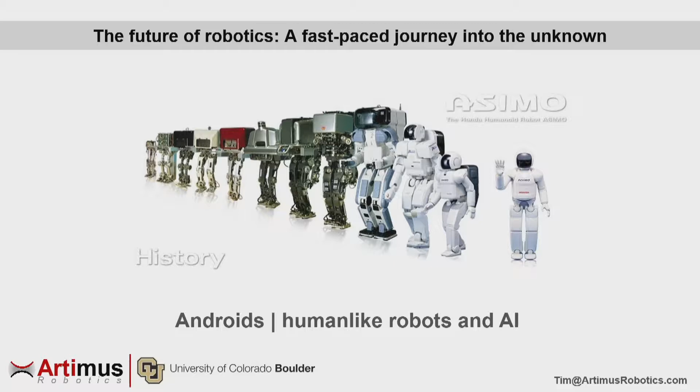So I think we're in for a very exciting conference. With that, I want to talk to you about robots. If I asked you to picture a robot, you'd probably picture something like Star Wars' C-3PO, and that's because that's what the history of robotics has looked like. But if I asked you to think of the future of robotics, you might take a very different vision. Maybe you'd picture something like Westworld's lifelike robots, which could even be a threat to humanity. But instead of thinking of how the rise of technology and robotics will lead to our downfall, I want you to imagine how robotics can empower us, even lead to the next stage of evolution.

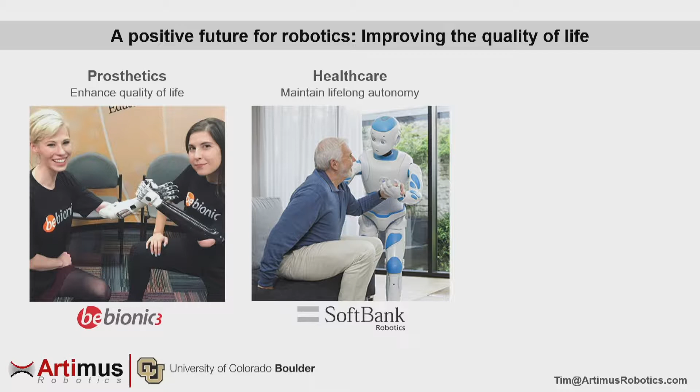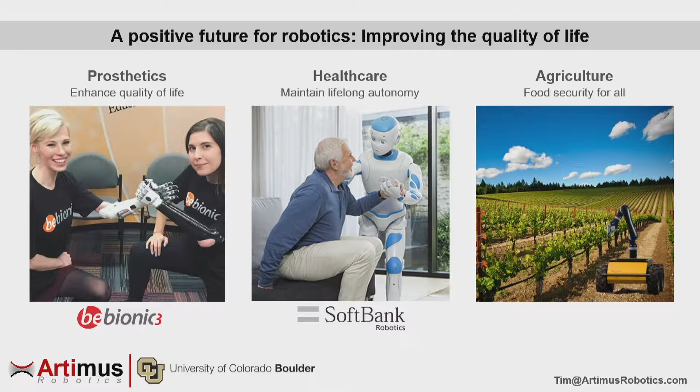Because when I think of a robot, I think of so much more than a vacuum cleaner for my home. I think of a prosthetic device to help enhance someone's quality of life. I think of a healthcare robot, so my grandmother doesn't need to live in a nursing home - she can maintain her autonomy. And I think of an agricultural robot to help feed our growing population and remove the lowest paying jobs. With this beautiful vision of a robotic future, you should not be asking yourself if this will happen, but when and how.

I'm Tim Morrissey, co-founder and CEO of Artimus Robotics, and today I'm here to talk to you about the future of robotic motion. Let's take a look at what's going on in robotics today.

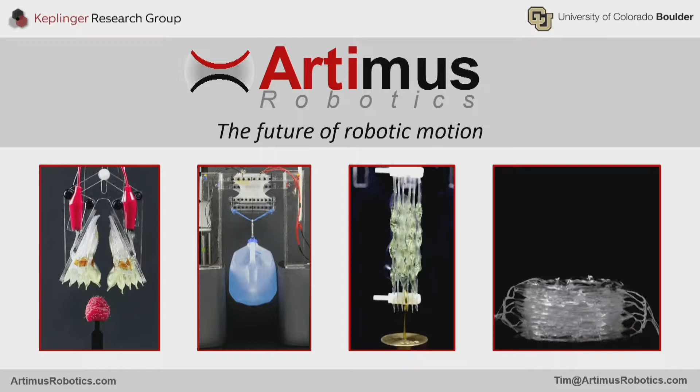This is Honda's Asimo, and if you remove its friendly covering, you start to get an idea of why you and I don't own an Asimo yet. It's comprised of metal gears and motors. These are heavy, complicated, inefficient, making the device expensive. This product apparently costs $2.5 million to make.

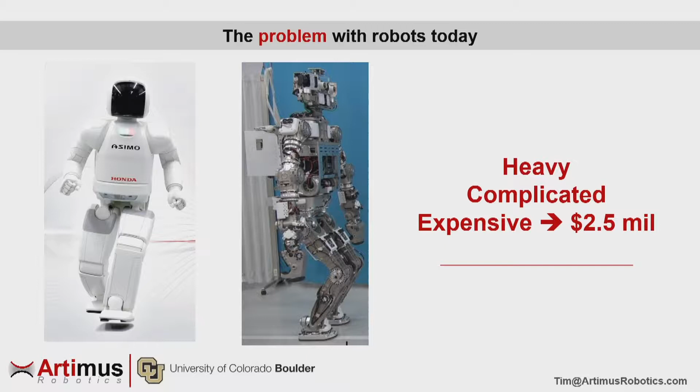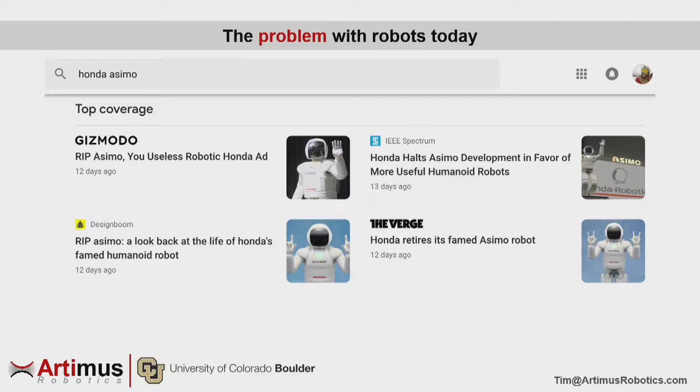And has anyone seen Asimo in the news recently? Honda just announced it's ending the Asimo project. And so if a major corporation like Honda can't figure out consumer robotics, maybe it's time we take a different approach. Maybe instead of using gears and motors, we use something more elegant, something inspired by nature.

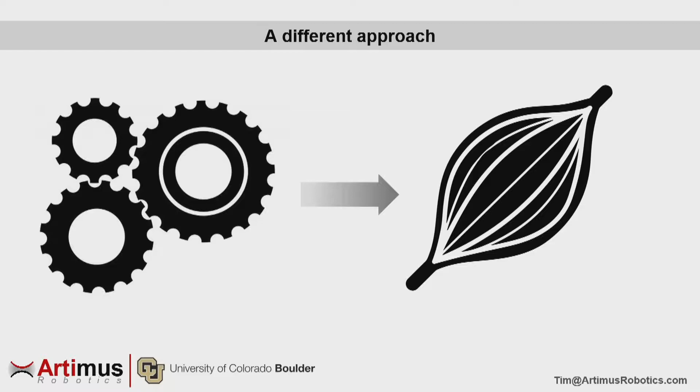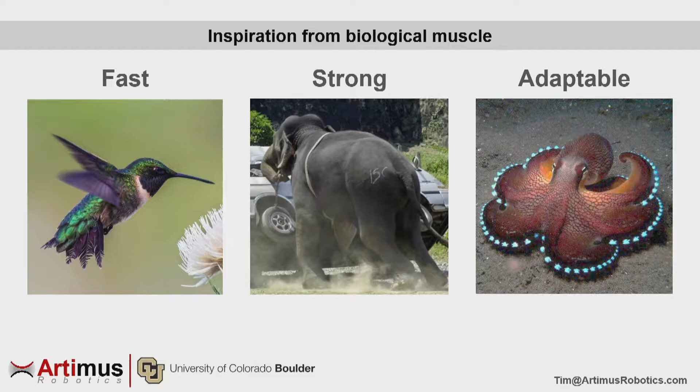The natural muscle is an incredible device. It can be very strong, fast, it's adaptable. My team at the University of Colorado Boulder set off to try to recreate this technology. We tried to make an ultra-versatile artificial muscle.

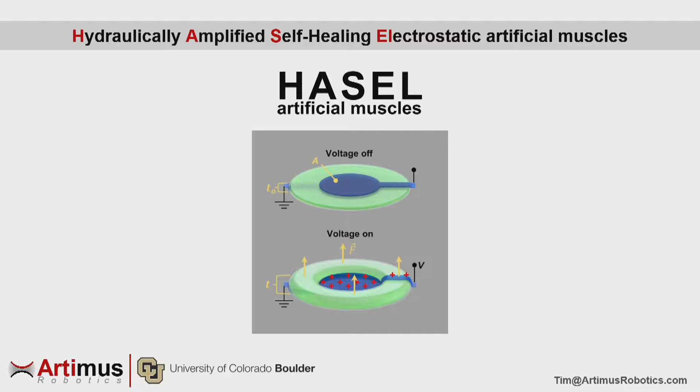We took an old science and applied it in a radically new way to introduce HASEL artificial muscles. HASEL stands for hydraulically amplified, self-healing, electrostatic artificial muscles. And I'd love to show you what we can do with it.

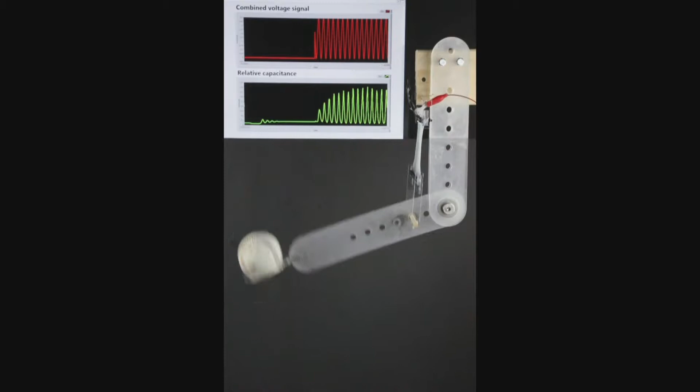HASEL can operate like a bicep with precise motion, fluidic continuous motion, and rapid motion. HASEL, because of its capacitive nature, can be self-sensing - so with the same two wires, you can both actuate and sense position. Because of its self-healing characteristics, you can scale HASEL up and start to do real-world tasks. It's powerful enough to jump off the ground, yet delicate enough to handle simple tasks like picking a ripe raspberry.

We released this work earlier this year, and the response was fantastic. HASEL, a true breakthrough in actuator technology, got national and global press coverage. And I think the reason for this was because of how elegant and beautiful the solution really is.

There are three key components in a HASEL actuator. There's an electrode to conduct electricity. There's a stretchable or flexible shell, like a thin plastic film. And there's a liquid dielectric, which is inherently self-healing because of that liquid property.

The first liquid dielectric we ever used was actually just canola oil from the local grocery store. To operate a HASEL, we'll apply a voltage, which introduces a Maxwell stress that acts on the liquid dielectric. This will locally displace hydraulic fluid and drive a shape change in the soft structure.

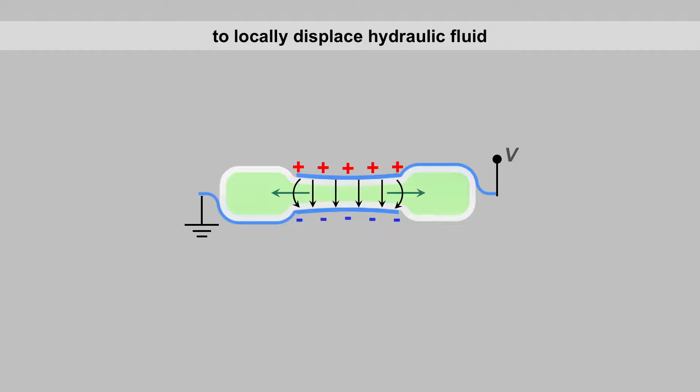I told you earlier we set off to recreate the performance of natural muscle. How do we do? Well, if you look at that hummingbird, it flaps its wings about 10 to 80 hertz. HASEL operates above 100 hertz without reducing its strain. For strength, a great performance characteristic is the power to weight ratio. Natural muscle averages 50 watts per kilogram, 300 peak. HASEL beats it by nearly an order of magnitude in both.

And adaptability - I already showed you adaptability. With that same structure, we can design all sorts of devices: devices for jumping, for gripping, for linear motion.

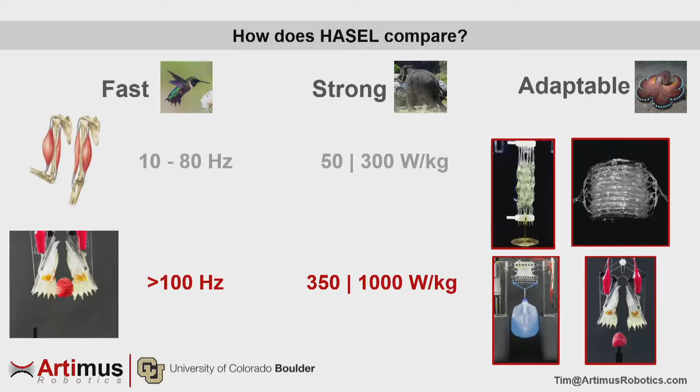Don't be excited about where HASEL is today. Be excited about where we're going.

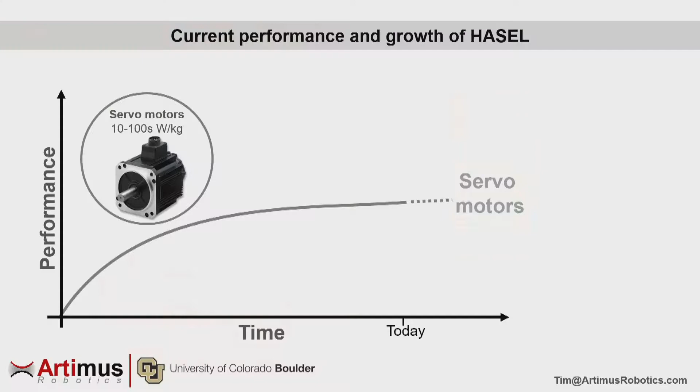The incumbent technology, such as a servo motor, has been around for over 100 years, with a key performance characteristic of a power-to-weight ratio in the tens to hundreds watts per kilogram. In just the 3 years since HASEL's been worked on, we've already exceeded this performance characteristic. This trend is true across the board in key actuator performance, efficiency, speed. Where we're going is quite astonishing.

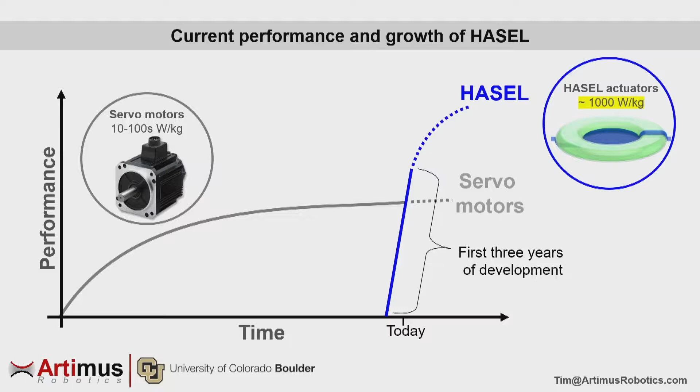So I've talked a lot about actuators, linear motors, servo motors, HASEL actuators. Where are these actually used? Well, in those robots I opened with, these would be your legs, your arms, your hands. But actuators are everywhere. If you took an automobile to get here today, you've already used actuators. In a car, those are going to be your locks. They're used for fluid regulation. They're used for brakes.

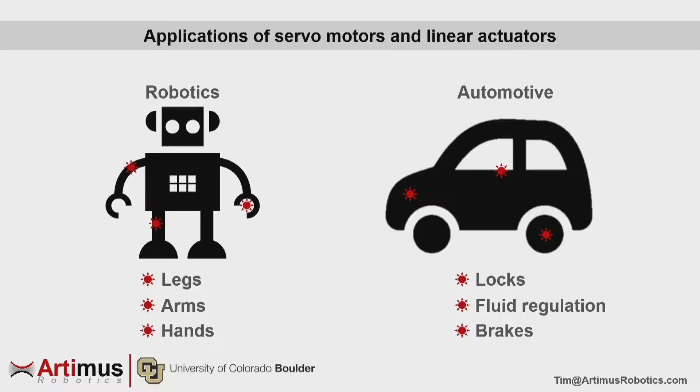But these are complicated industries, both robotics and automotives. Take the example of the consumer robot. There are many, many parts in this. And Artimus Robotics, we're not going to make a consumer robotic today. We're a new startup, not even a year old. We're going to provide the components and sub-assemblies that get incorporated into the next generation of robotics. We want to sell to the Boston Dynamics, the Misty Robotics, to help them get this lifelike motion.

That's for a few reasons. First, that's where our IP lives. We have 2 provisional patents, 1 recently converted to a PCT, and a 3rd one in the works.

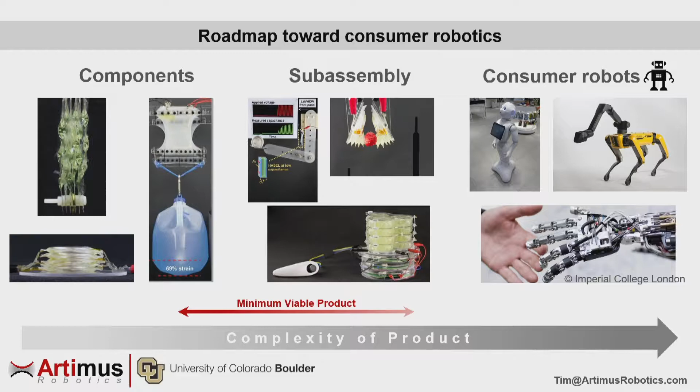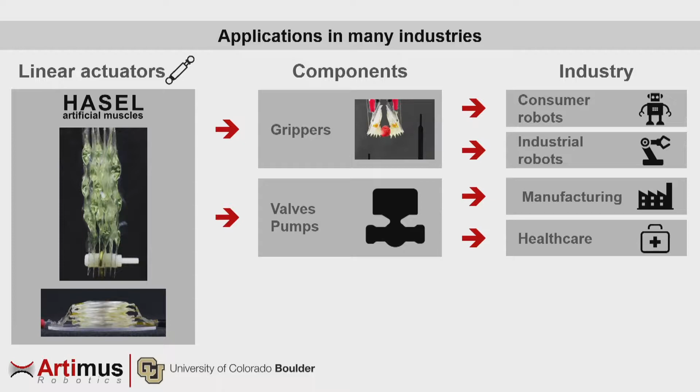But also, by producing linear actuators, really no industry is off limits to us. That same linear actuator that goes into a gripper for the consumer robot can go into a pump for manufacturing and healthcare, or it can be used for a haptic surface in automobiles and vehicles. I don't know how many actuators there are on the space station. I would guess it's in the thousands or tens of thousands. Those are all made out of metal. Metal's dense, metal's heavy. Our actuators are more lightweight, cheaper to get it up there.

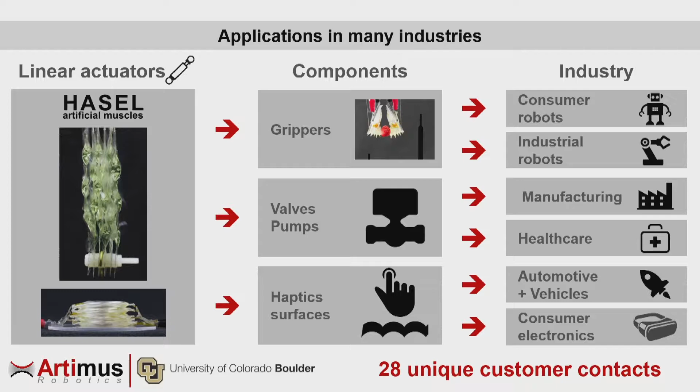And for consumer electronics, there's a lot going on in this space for haptics. One company I already heard you're familiar with, Somatic Labs, just moved to Denver. We actually met them at the Ignite the Night event earlier this year, and they even provided us with a letter of support for a Colorado AIA grant we just applied to.

But we're not just talking to startups. We're talking to major players as well. Microsoft, Google X, Mercedes-Benz. They've all reached out to us to learn about our technology. And our academic research team, the Keplinger Research Group, already has proven we know how to work with these big players. We've had a follow-on grant with one of the world's largest automotive manufacturers. We know how to meet these industrial milestones.

The linear actuator market, it's huge. $50 billion by 2022. So where does HASEL fit in there?

Well, that's what we're working on right now. Like I said, we're a young company. Where can we take our key features of high power to weight ratio, fast, lightweight, silent, that we're soft and compliant to be adaptable, that we have direct linear motion and are quite cost effective? Our bill of materials for a single actuator is well under $1. Where do these features turn into customer values?

In which industries? But of course, there's technical challenges along the way as well. We need to figure out our characterization more on an industrial standard. We can do it in an academic setting, but what about at 1,000 cycles, 1,000,000 cycles? And the electronics has some hurdles too. I'll get into those in a second. But my team's identified that we need to focus on mid-scale manufacturing today to address both those challenges.

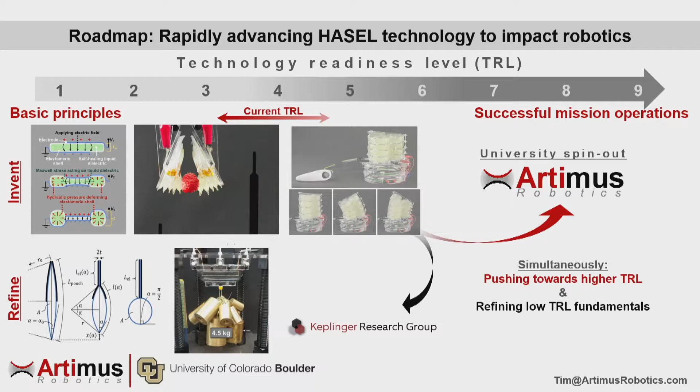It's fantastic. What's Artimus been up to since we started? Well, we've already had success. Earlier this year, we were at the University of Colorado New Venture Challenge, where we were fortunate enough to take home 2nd place in a pitch competition. And then just a few months ago, we were down at Denver, Ignite the Night, where we were fortunate enough to win 1st place and brought us to this stage here.

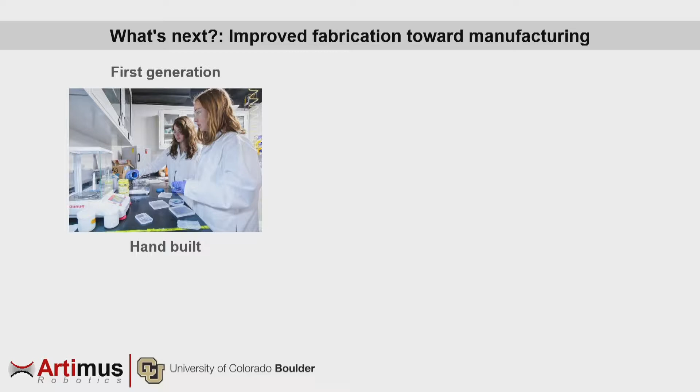But we're not just going around to pitch competitions. We're working on technical problems as well. The 1st generation of HASEL was all hand-built. Works great for an academic setting, not as appropriate for an industry setting. So we started to automate some of this. We took a 3D printer, hacked it together, and made some automated heat sealing. That's coming out in an academic publication soon.

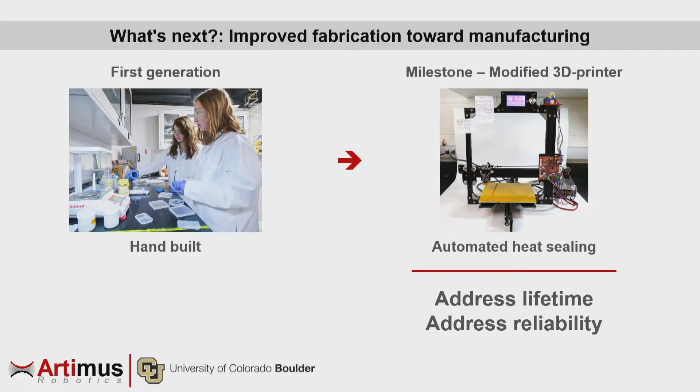This helps address the lifetime and reliability. We've already taken this a step further, looking to turn this into a roll-to-roll manufacturing process that I would love to chat with you offline about. And I also told you we have some hurdles in electronics. 1st generation of HASEL used a refrigerator-sized $50,000 piece of test equipment. Again, what's the point of having a portable actuator if it's tethered to that? So we miniaturized our electronics.

Reduce the size by an order of magnitude, reduce the cost by 2 orders of magnitude, and while we're at it, we also increase the electromechanical efficiency, currently operating at about 50%.

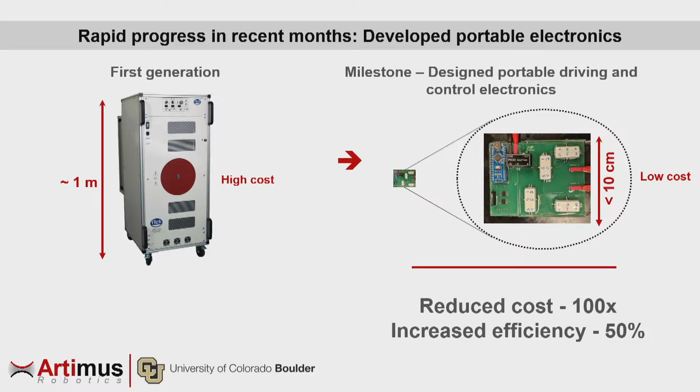These milestones have been fantastic. The research started in 2015. It's been moving quite nicely in the academic setting.

Spun out Artimus earlier this year. We're funding it through a VC gift from our university. Our technology transfer office introduced us to some local VCs that actually gave a gift to the university. You don't hear academics talking about how great their TTO is too often.

And also, I just found out last Friday that we're a finalist for a Colorado AIA grant that's going to help us move that mid-scale manufacturing further and develop development kits to provide our customers with test units.

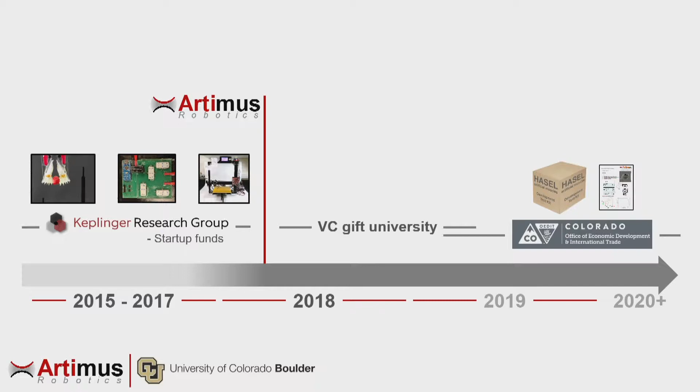Some next goals: we've got to get the IP out of the university, of course. I've already started these negotiations. They're off to a great start. This isn't a concern, and we're doing this because we already have some great things ahead.

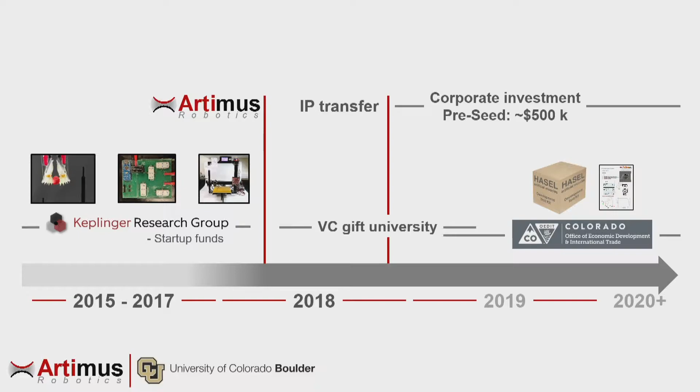I'm in advanced discussions with a corporate partner interested in making a seed or pre-seed investment around $500,000, contingent on getting that IP. And also, we're looking for our first sale.

We're hoping that we'll have a minimum viable product and some revenues by the end of 2019, early 2020. We'll need investment to get there.

How does all this happen? Because I have a fantastic team. I'm Tim, will be finishing my PhD next month, and excited to be the CEO of this company. With me here today is Eric Acome, lead engineer on this project.

He's had experience in both startups and consulting for government labs. Shane and Nick are back at CU doing fantastic research to push the technology, and we're very fortunate to have a world expert in artificial muscles, Professor Christoph Keplinger, who's a Packard Fellow.

So why am I here? Why NASA? Why HASEL? The good news is that's already happening. HASEL's been incorporated into a NIAC Phase 2 that kicked off a few months ago.

And just last week, we sent up a HASEL technology into one of those microgravity planes to see how it performs. We're waiting to hear those results back.

What could I use from you folks here? Well, from the NASA chief technologist, I want to hear about your unique motion challenges across your labs. HASEL provides some unique solutions, and I'd love to chat how we could work together.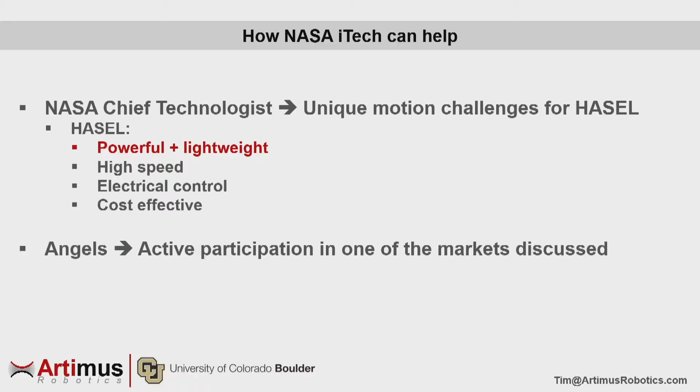For any angel investors in the room, I'm looking for someone that wants to roll up their sleeves and get involved. Like I said, I'm looking forward to this corporate partnership that is looking promising late this year, early next year, and I'd love to have someone to come in alongside that to supplement that, both with business talent as well as with financial contributions.

And then for the investors in the room, we are absolutely looking for corporate partnerships, both on the supplier and customer side. If you make thin plastic films, liquid dielectrics, electronics, or simply manufacturing equipment, I think we could make a nice partnership. And if you use an actuator, which I should have already convinced you almost everyone does, we would love to work with you too.

HASEL Artificial Muscles will be a key component of the future of robotics and automation, and I'd love to take your questions.

For sure. So the question's about environments. The question was about extreme environments in terms of temperature, heat, cold, radiation, NASA-relevant missions. This was definitely something that came up when we were brainstorming to integrate this into that NIAC program. In terms of environment, in terms of temperature, we'll start there.